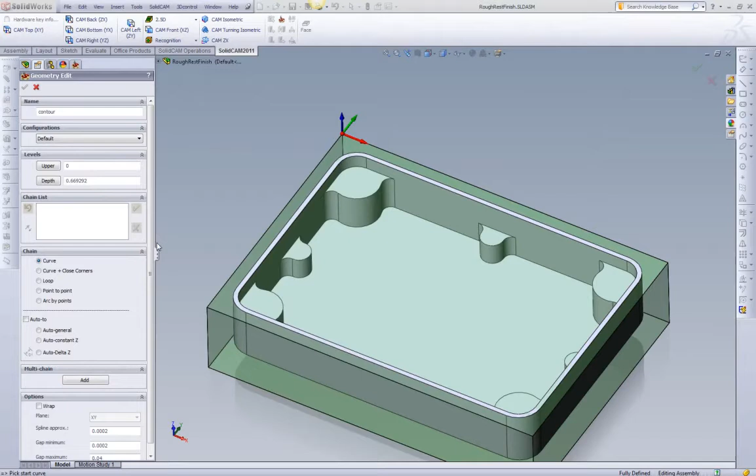Hi, in this video we're going to use iMachining to rough, rest rough, and finish a geometry. So we'll create a new 2D iMachining operation. We're going to define our geometry. We're going to machine this pocket at the bottom. We'll pick our level and we'll name our geometry.

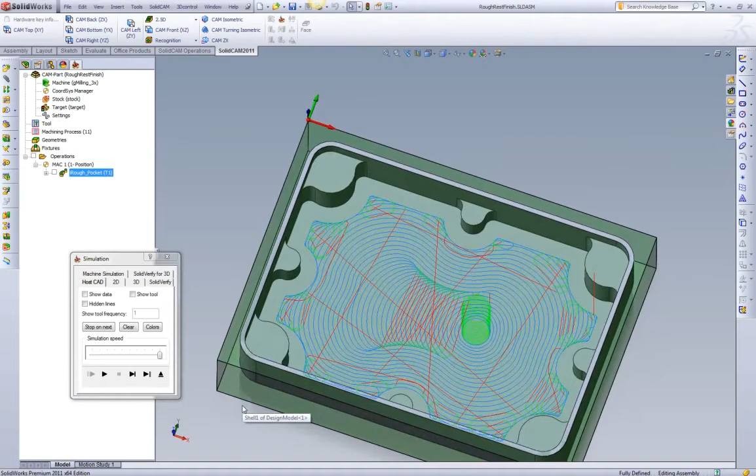We'll go select our tool. The first tool we're going to use is a 1/4 inch end mill. And we're going to use level 5 in our iMachining wizard. We'll take a look at the toolpath. Here we can see it roughed out. Take a look at it in SolidVerify.

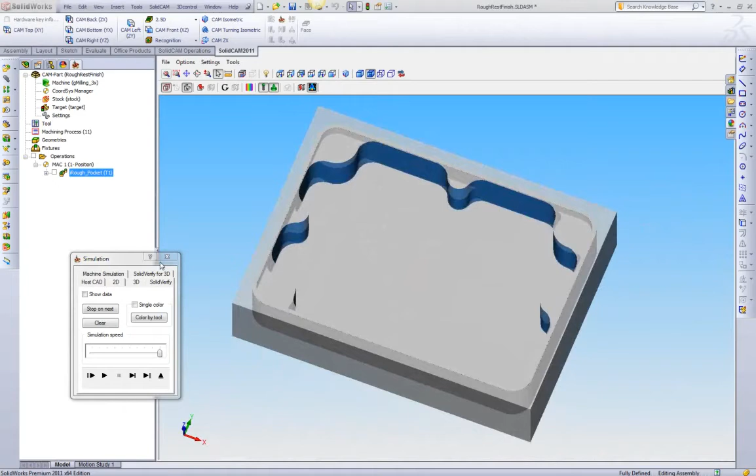If we look at our finished model, we can see that we have material in all the corners and also on the wall. So if we want to rest rough this operation first before we go to finishing, all we do is click Save and Copy. We switch our technology to rest. We go grab our smaller tool. We're going to stick with the same level 5 in our wizard, and we calculate. iMachining is smart enough to automatically use the last operation as its rest material.

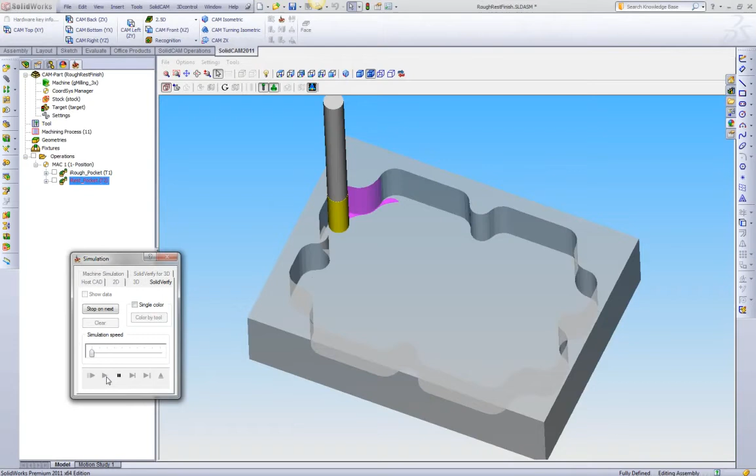If we move to our SolidVerify and slow it down, we can see it now rest roughed the entire area. Now if we slow this down to a very slow time, we can see what's actually happening. The first thing that's happening is it's taking away, in one pass, the leftover material on the wall. As we speed it up, once it finishes with that, it will then move to its corners, taking away all the material in the corners.

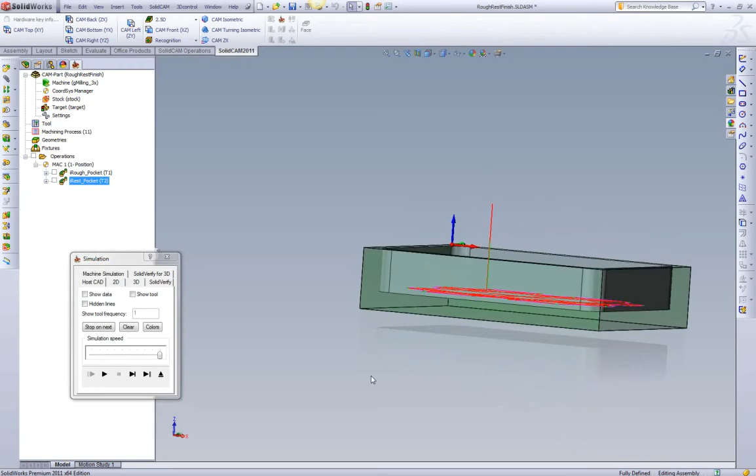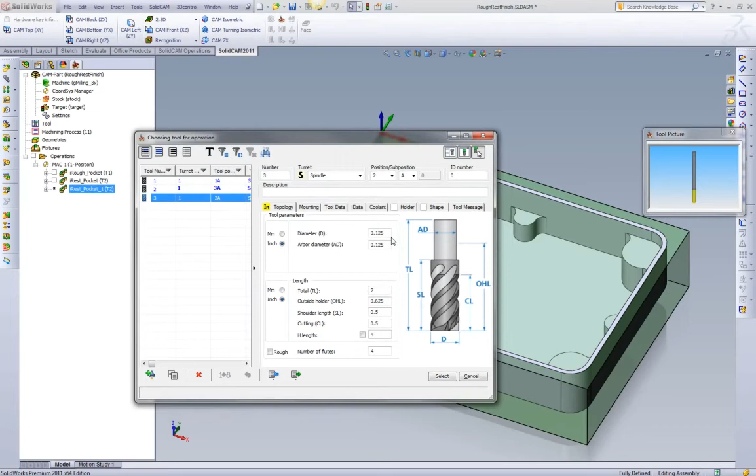If we look at this in the host CAD, as always with an iMachining toolpath, no retracts. Tool stays down, not getting any unnecessary air cuts. Now we want to go to finishing. So we save and copy that operation again. We click Finishing. We go to our 1/8 end mill for finishing. We'll stick with our level 5 again, and we'll calculate.

Now finishing is going to do something different than rest roughing. It is going to be based on the rest roughing operation, but what it's going to do first is it's going to clean out all of the areas that are bigger than the wall offset. So what we're doing is we want to be able to take one final pass around the contour at the programmed wall offset.

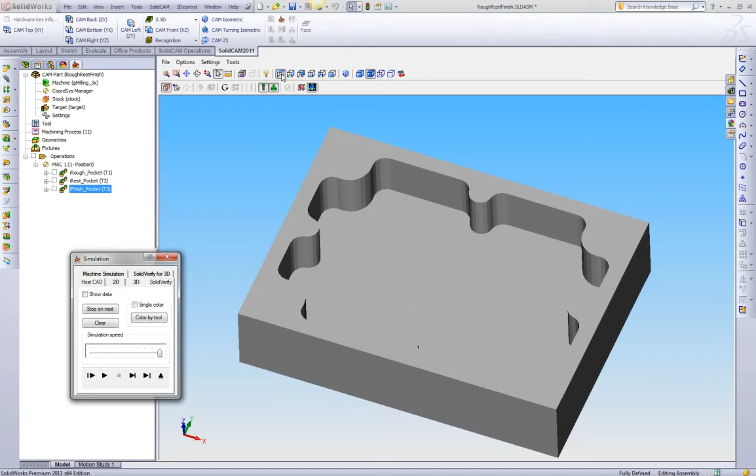So if we go to a top view and look at this, we can see all the corners are being removed first. We'll go back to our isometric. Slow it down. We see all the corners are being removed in preparation for a final finish pass. And then we get our final finish pass at the programmed step over, or wall offset.

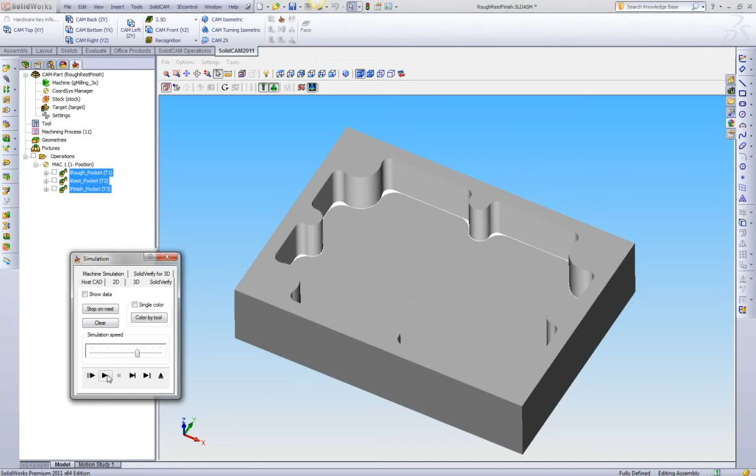If we simulate all three of these together, we'll take a look and see what we get. So we have our roughing toolpath, which is clearing out the bulk of the material. We have rest roughing after this, which is taking a smaller tool and progressively shaving away all of the material, where most of it is left over in the corners in this scenario.

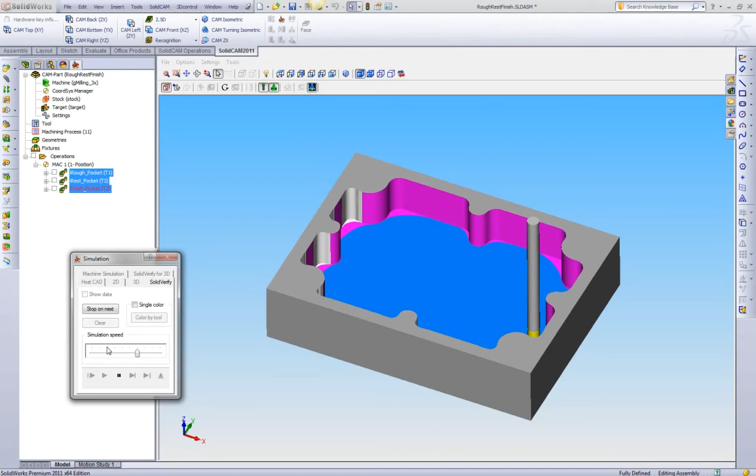And then after the rest roughing is done, we're going to move to our proprietary finishing technology. In our finishing technology, we automatically clean out all the corners and then move to one final pass around the wall.

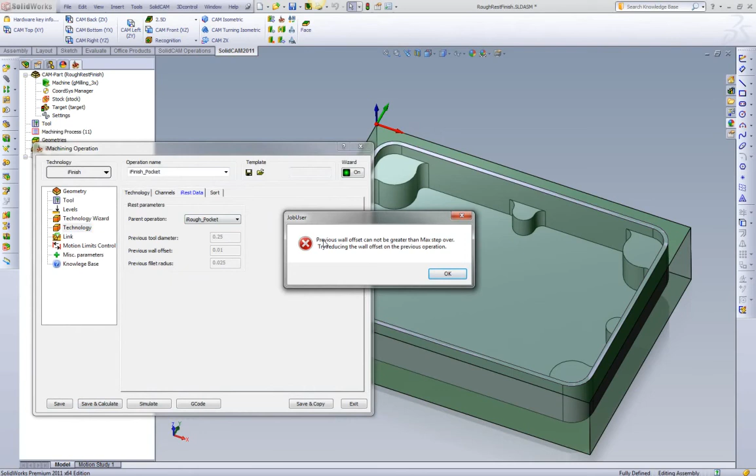Now a lot of customers go directly from roughing to finishing. So what would happen if we wanted to do that? So what we'll do is we'll suppress this rest roughing operation. We'll drag it to the bottom and we'll go to the finishing. What we're going to do now is tell it to work off of the roughing toolpath. In this instance, we can see that SolidCAM is warning us and telling us that the previous wall offset cannot be greater than the maximum step over.

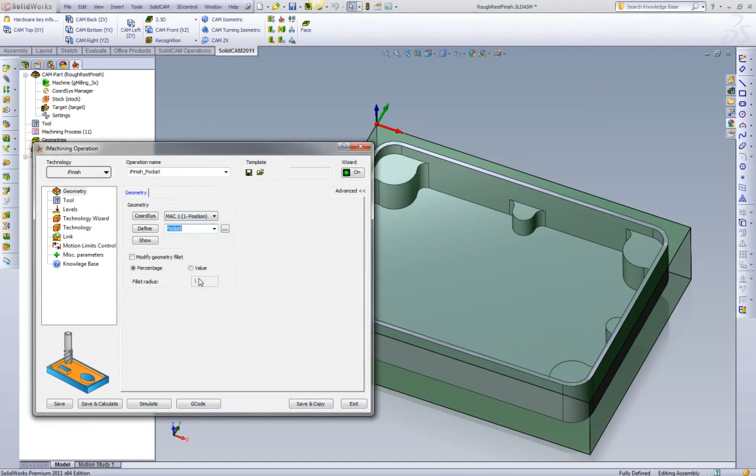So to do this, we're going to go to our roughing operation. We see that we were leaving 10 thousandths on the wall. Naturally, we are not going to take away the full 10 thousandths in one pass with a 1/8 end mill. So we're going to lower this down to 3 thousandths. Calculate our toolpath. We're going to move back to our finishing. Pick the rough pocket. Now when we calculate, we do not get any errors, because now we're roughing to the good wall offset that the finishing tool can take in one pass.

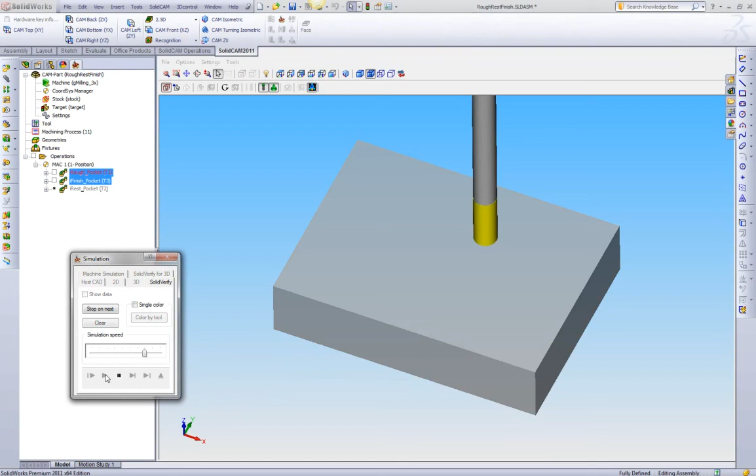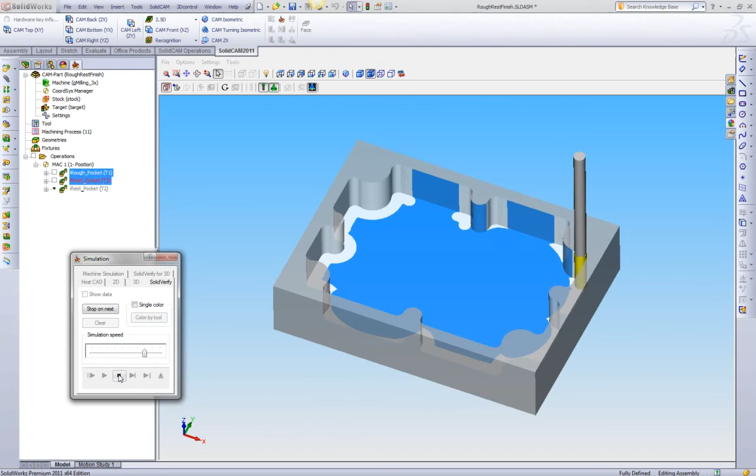Now if we go to our simulation and simulate both of these, we can see here's the roughing toolpath, same as it was before, but now roughing to 3 thousandths. And then after that, the finishing is going to come in to all the corners, finish all the corners to prep the final finish pass to be the step over that we defined. And that's how simple it is to go from roughing, rest roughing to finishing, or you can go directly from roughing to finishing if you like.